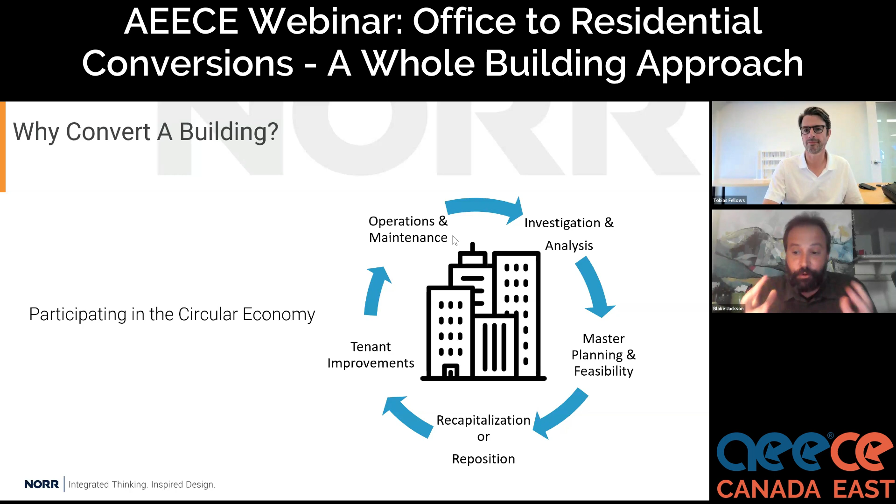Another big aspect of these projects is the ability for these individual projects to help regenerate our urban core. You can see in this image that, as Blake mentioned, there's a glut of office buildings within one location. And how can we use a building conversion program to help reimagine what a downtown can be, and really look at how these projects can bring people back.

I know the government is thinking about legislating a 3-day work week. That's going to bring people back in a particular way, but bringing them there to live is really creating the kind of change that I think will be necessary for these areas to really thrive, with all the existing infrastructure that is already built there, and these small businesses that rely on people. I think it's really important that we take this opportunity and reimagine our downtown urban cores, using this as a tool to reimagine them.

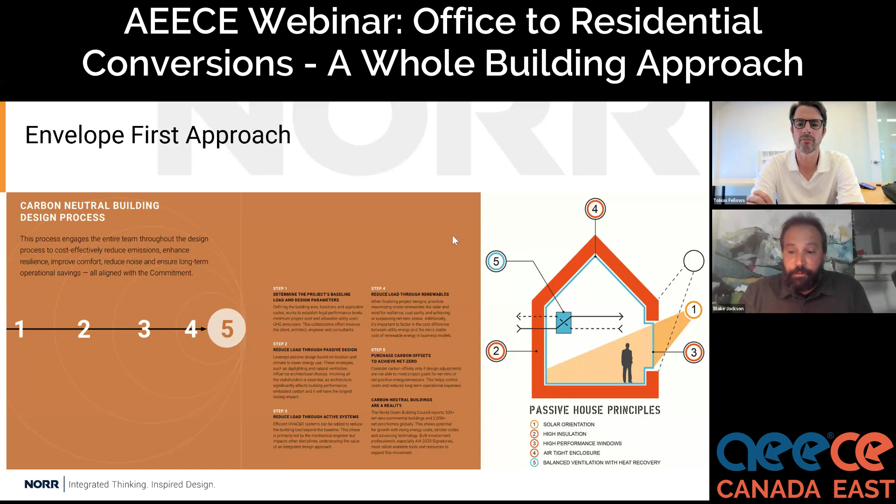So if we go to the next slide, this is just a look at that idea of starting with the building project and then right sizing the program, orienting it to its site and or climate, and utilizing nature-based solutions as we can. Obviously, we can't pick up and move around existing buildings, but we can open them up to better access to daylight. We can reconfigure space planning measures in order to respond to views and climate and heat and different types of things.

So by focusing on the envelope and getting it as airtight as we can, and pressurizing the building in ways that are promoting indoor air quality, and insulating where we can, and maybe replacing glazing where we can, suddenly it provides us an opportunity to downsize our systems as a response, to electrify those systems more affordably, utilizing again the architecture as a passive design element itself, or an envelope first based approach.

Then once we minimize those loads for those end uses as small as we can, then we can very cost effectively introduce either on-site renewables and or off-site renewables to get to a pathway to zero for existing buildings. Now, this becomes, again, more challenging the more you move towards the heritage end of the spectrum. But this is, again, an example of how an envelope first based approach can work in both a new construction scenario and a building adaptive reuse scenario as well.

Yeah, and the interesting thing about a passive house approach is Passive House actually has a rating system that allows you to upgrade a facility over time. So, for instance, if your mechanical plant still has 10 years of good life in it, through the Passive House EnerPHit program, you can do all of your other renovations, like your building envelope upgrades, and then you can go back and look at upgrading the plant at a later date. This system allows you to upgrade certain components over time. So that's something to be aware of if you're looking to get into a rating system to quantify your actual project.

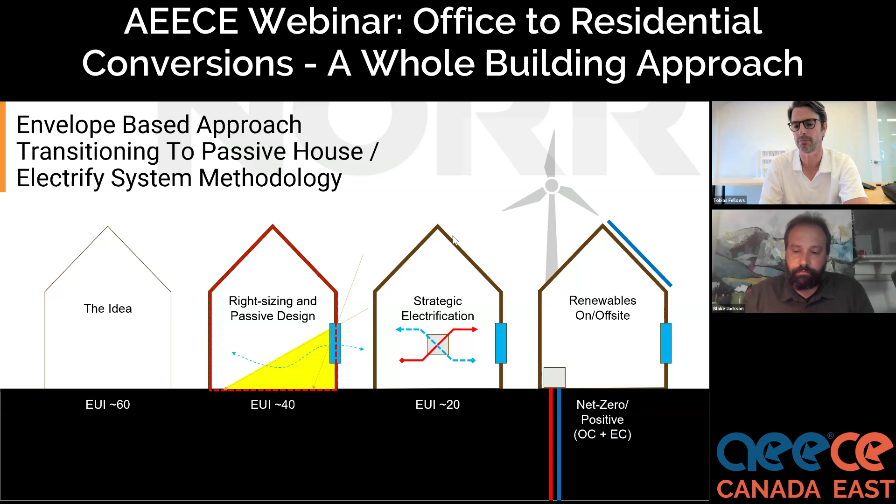And so we'll look at a project from my past work here in the city of Boston, where I'm located, but I do, again, practice across all of North America. This is a historically significant project on the National Register of Historic Places, so it would be considered heritage by Canadian standards, in the Charlestown Navy Yard. And this is a historic district and a historic building within a historic district. So we had a double whammy.

And it was an existing building that was somewhat falling into ruin, that was being reimagined as a potential affordable housing complex. And so we had the juxtaposition with the historic value of the building, and you can see some of the spaces on the inside that, well, it didn't take much logic to say, hey, we could do something really cool with this.

And the idea was that this was going to become a museum to the Chain Forge and the Navy Yard at some point. But we also had conflicting items: they wanted us to seal the envelope. They wanted us to electrify the building. They wanted us to raise it up because it was in a floodplain. There were lots of things that we would have been easily able to do in a new construction scenario, and yet we're limited by the heritage value of this building.

The one other point that I'd like to make here is that because this building is on the National Register here in the US, 50% of the pro forma could be covered by historic tax credits. Now, you don't get them until the very end of the project, and so it's a balancing act to determine if you are in kind or in good faith preserving the historic and architectural value of the building. And there aren't very specific guidelines on what that means, because each one of these structures is unique.

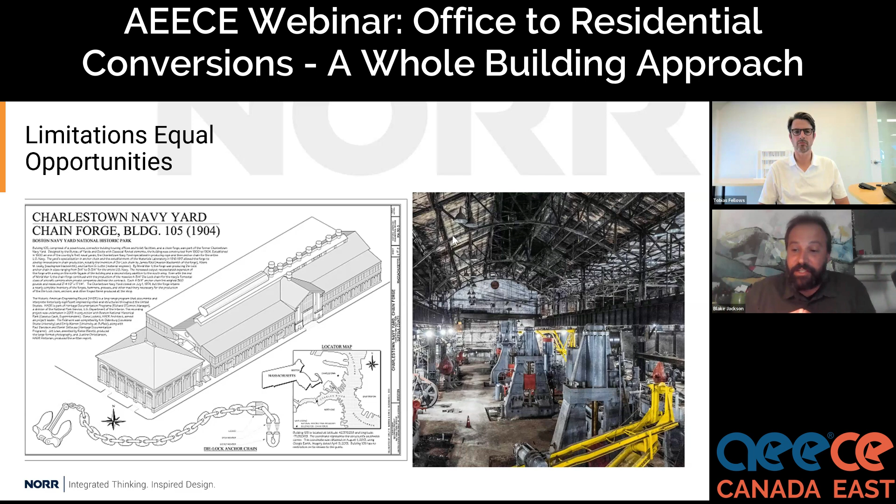So we had to balance the need to meet what the city wanted, which was essentially a new construction, all-electric passive house in a very leaky, old, historically significant building, which created a lot of challenges. So if we go to the next slide, talk through some of those opportunities here and on the next slide too. But basically working with the existing building to say, well, we need to evaluate what's there anyway, and what makes this historically significant versus what can we improve.

And so in this case, we were actually able to add insulation on the inboard side, which did take away from some of the character of the building in terms of the exposed brickwork, but it was something that we had to do just to meet modern codes, as well as to really focus on the outside of the building, which was what was truly historically significant, particularly since we were modularizing the spaces and putting in housing units. You were going to lose a lot of that capability on the inside anyhow, and most of the value was going to be on that large nave space, which was going to be converted into a museum.

We were also able to update the windows and the glazing systems to modern glazing systems, and particularly because we had a low window to wall ratio, we were able to get through the energy model double pane glazing, so it helped to control the cost on that as well. So we were also able to repoint the brick systems, seal up some of the areas, keep a lot of these types of things hidden. But again, a balancing act, working with what the existing building was and its actual inherent architectural heritage value, and new concepts that would enable us to downsize the systems, the energy use intensity, decarbonization, and even potentially electrifying all of these units whenever we worked on the project.

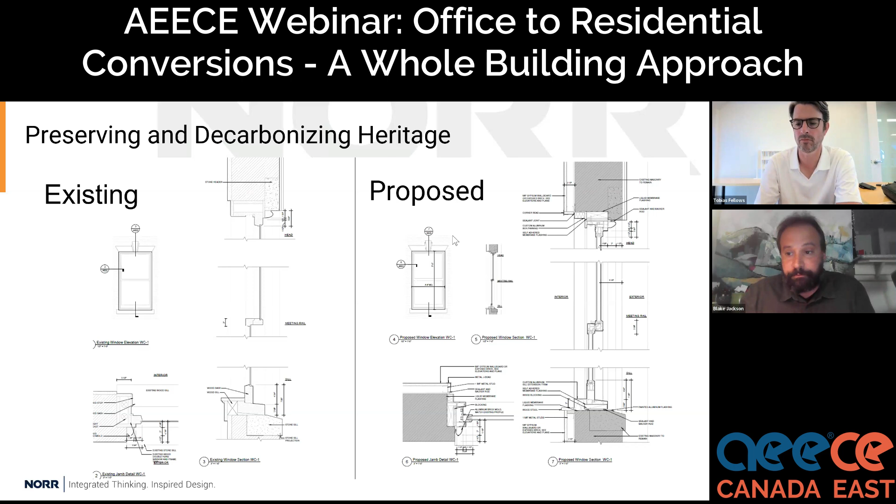If we go to the next slide, this is just to compare the Chain Forge project to another project that we did with the same developer, to say that what we did for one doesn't necessarily mean it's going to get approved from the city side or the historic preservation side in the other instance. So some of these things were left to be determined. But the point here of the envelope first approach rings true, because if you look at how we would evaluate this from an energy modeling perspective and then also a cost estimation perspective, we look at, well, can we alter the roof?

Well, in this case, we had a historic slate tile roof. We couldn't put solar on it, so renewables are off. Upgrading the roof was off, but we could insulate underneath it. So it creates these opportunities for how we can maximize the envelope utilizing modern codes, modern building mechanisms and techniques in order to preserve the historic value. But notice we're looking at roof, envelope, glazing, window to wall ratio, which doesn't change in a historic building unless you're making an addition, and airtightness. You have to focus on that first before you go to the systems. And this is really where the work on a type of project like this begins, but it starts with the architecture.

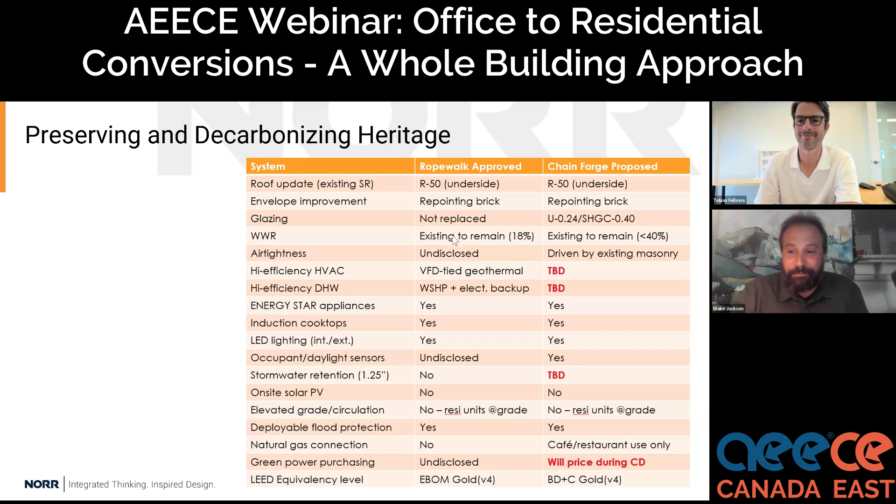And then also on to responsible water use. So water is artificially very inexpensive, so it's very difficult to generate a return on investment for it, but it's another utility that transparency around disclosure of building performance is requiring us to monitor, disclose, and manage.

And so on projects, generally, we will be provided an opportunity to make a big water reduction impact over the baseline by looking at indoor, outdoor potable water use, irrigation systems, the potential for rainwater harvesting, which is very useful, particularly in that scenario that we talked about with increasing stormwater retention and the potential for increased resiliency, particularly in areas that are going to experience more precipitation in a climate change scenario.

That's not always an opportunity for us on existing buildings, particularly heritage buildings. Sometimes you can or can't touch or adapt the site. But again, we're always looking at opportunities to meter and specify efficient water fixtures so that we can reduce that source at the point of use.

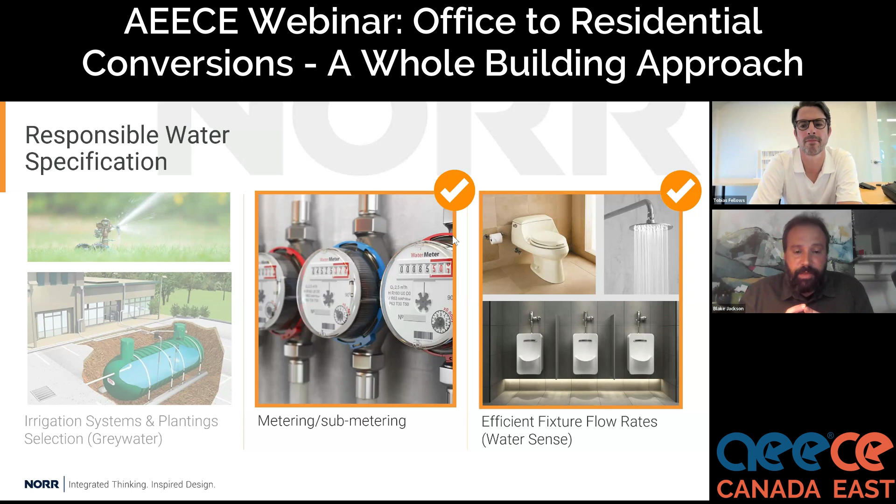And the next slide just talks about some of the specifications opportunities that just through the plumbing fixtures, we can reduce potable water use in existing buildings by at least 40%. And this is a little unfair because that would be like if we were renovating the building from office to office. So it would be very different with more fixtures if we were renovating it from office to residential.

But in any scenario, providing new plumbing fixtures, modern plumbing fixtures that are very efficient helps us in that efficiency, as well as reducing our costs and ability to monitor and report on utility data use for both water and energy systems.

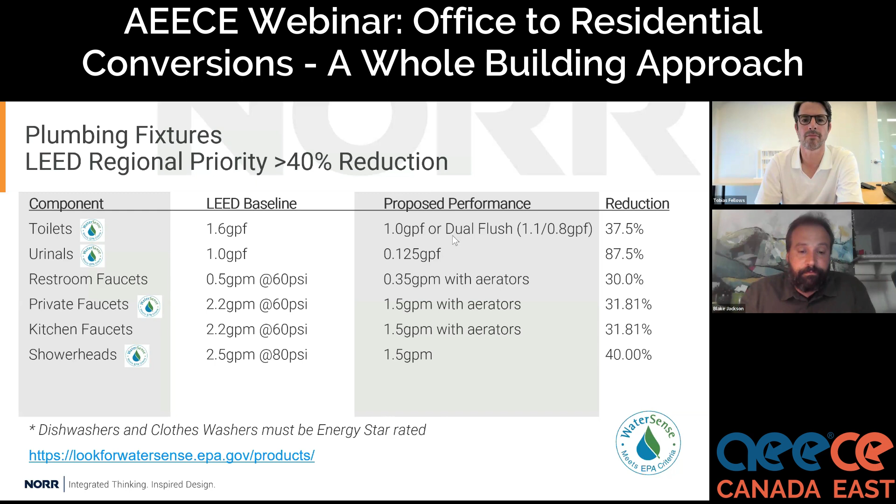And then lastly, all of this work is really predicated upon changing the way that we practice architecture and engineering. So traditionally, we design something, we fall in love with it, we get the cost estimate back, and then we have to sort of begin value engineering pieces of the building out that make it unique and wonder why buildings just become a bit monoculture.

The idea here, particularly because we're focusing on carbon, and this is the direction that Passive House is moving, cities are moving in, green standards in various different municipalities, federal standards, even LEED version 5 is looking at holistic carbon, both embodied and operational, early in the process. And so that requires us to do earlier phased energy modeling and cost analysis so that we can use those not as hallmarks of decisions that we make, but to drive the process forwards, thinking about carbon and thinking about building performance.

And so by doing this work earlier, we're able to make those decisions about the life cycle of a building so that we can strategically come in over the course of the time period which we have to decarbonize, which in different municipalities is 2040 to 2050, to say that, well, maybe we don't do everything right now. We focus on the envelope, strategically electrify some of these systems, and then in 10 years when we replace X, Y, and Z, that's when we come in. So it helps us to make those types of decisions dynamically early in the process in ways that we didn't before. So it's very important to bring that cost estimation and carbon performance modeling to earlier in the process.

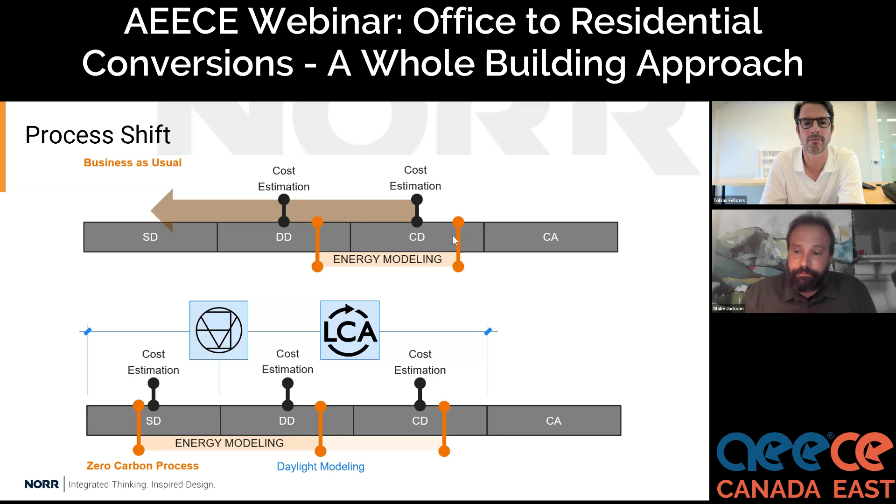But this makes the argument for why it's important to bring these mechanisms to earlier in the design process, because at procurement, you lock in the embodied carbon build of a building forever. Now, in an adaptive reuse scenario, these numbers are way down.

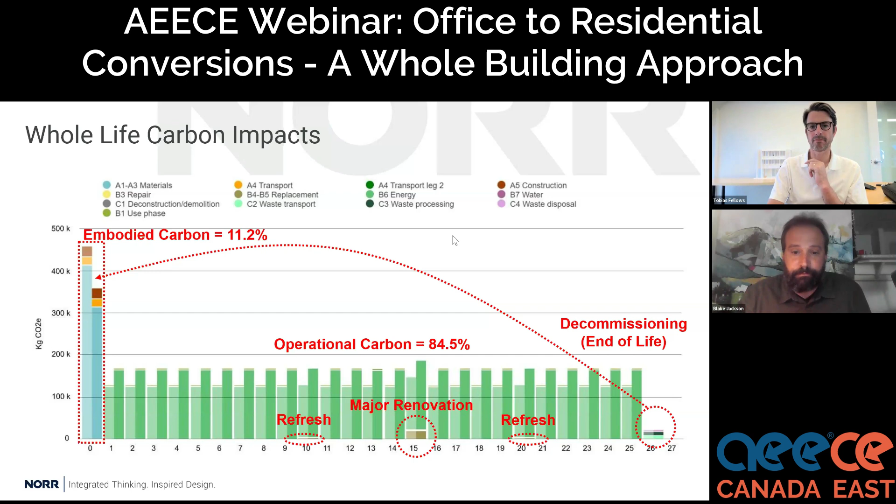And then lastly, we talked about how renewables aren't a first solution. They come after you make the building as optimal as you can, because that helps to control costs and the amount of renewables that you need. And so we are a bit technology agnostic and approach agnostic. We look at the right opportunity that's available to us for the various different projects that we're responding to. There's traditional panels, there's panels over parking, there's on-site wind, there's building integrated PV.

Some of them look like traditional panels, and some clients love that because it directly communicates an ethos between sustainability and the consumer. In other instances, particularly for heritage buildings, those things need to be hidden or concealed. And so there's technologies that allow us to do that by incorporating them into the roofing membranes or onto the building facades, or even the promise of solar glass, which I keep seeing examples of, but not a lot of built examples of. But I'm sure it's out there somewhere. The technology has to exist at some point. But every facade, including the roof and the ground, offers an opportunity to integrate tasteful and meaningful renewable energy to be a part of a net zero carbon strategy.

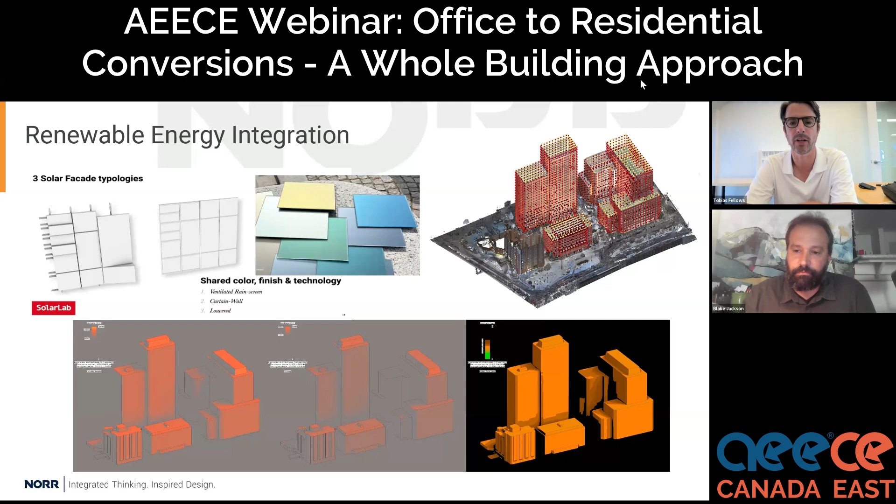We're going to move on. We're going to just hit the last section and talk about some of the challenges and considerations, and then we'll open it up to some questions after that. I think there are three main challenges for these projects. We've touched on some of them already. Obviously, zoning is a big challenge. If you're trying to convert a building within an industrial zone or within a downtown core which is zoned for office buildings, then you're going to need to work with the city and the planning departments to change that to make it acceptable for residential use. I think the cities are aware of these challenges now and are working to try and streamline the process of rezoning. But it's something that has to be looked at the onset of a project, at the very beginning of a project.

Also, because the pro formas are very cost sensitive, we really look at the building code, and we look at part 11 of the building code for existing buildings, and we see where we need to make upgrades and where we don't. If a stair is acceptable and we're not touching that stair or doing work within that stair, then we'll leave that stair as is, and the code allows that grandfathered stair to be not touched because it's not practical to update such a major component. It's not always the case that we can do this, but where we can, we will.

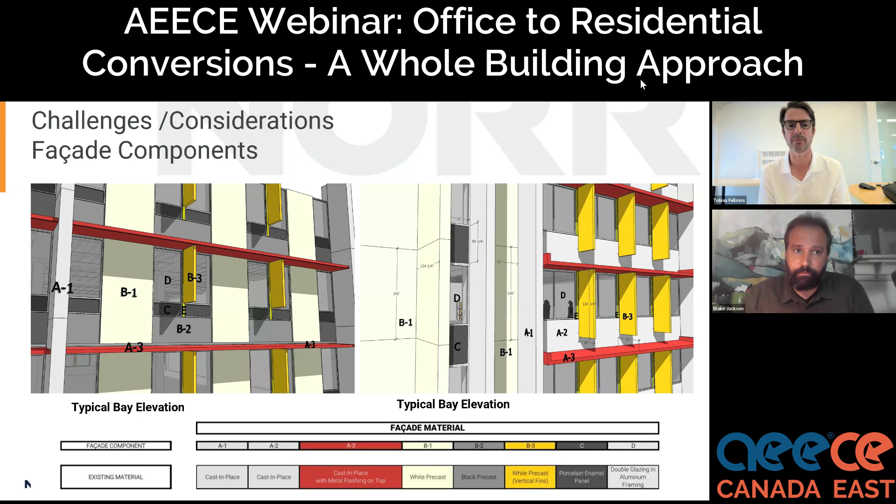So when we were studying this project, we look at elements that we call latent defects. These latent defects are defects in the building from when the building was originally designed. What we're looking at here is one of those horizontal louvers. It's attached to the floor plate and the vertical wall, and it goes from the inside of the building to the outside of the building. So it's obviously a massive thermal bridge. So in these situations, we consider this a latent defect. We really have to study it and understand the implications of this.

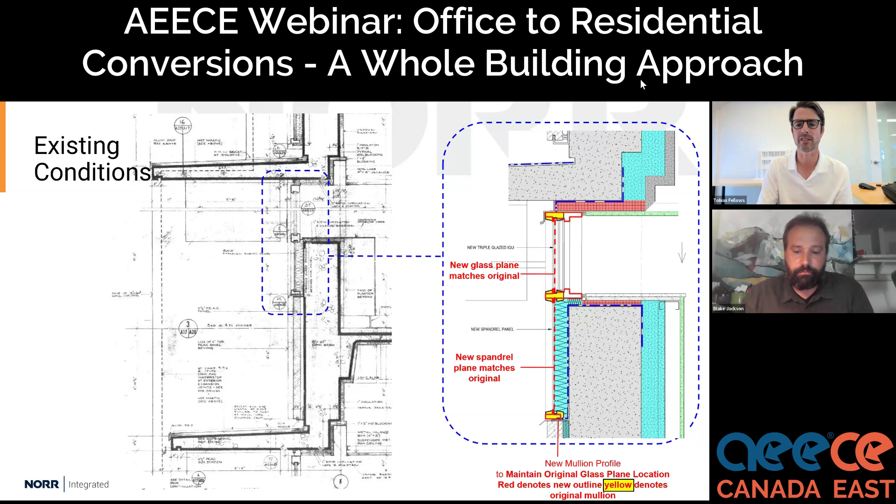And it could be dew points coming in, it could be thermal comfort, it could be durability, and it could be the building envelope and the energy performance of the building. So we really look at all of these things holistically and try and understand. And on the right, we start from a kind of idealized scenario with what would we do in the perfect situation. Well, we want to ideally put all the insulation on the outside, but we can't always achieve that. So sometimes we start to study and we start to get more pragmatic.

We say, okay, well, this can easily be done. The horizontal aspects can easily be done from the outside because we're going to be replacing some facade material, so we can get at it there. But maybe we're not replacing that facade element. Maybe we want to retain the precast, in which case we have to do everything from the interior. And so looking at all of the options and being very pragmatic about what kind of solutions are going to work from a technical perspective, but also from a cost perspective, these are things that we have to do on these types of projects.

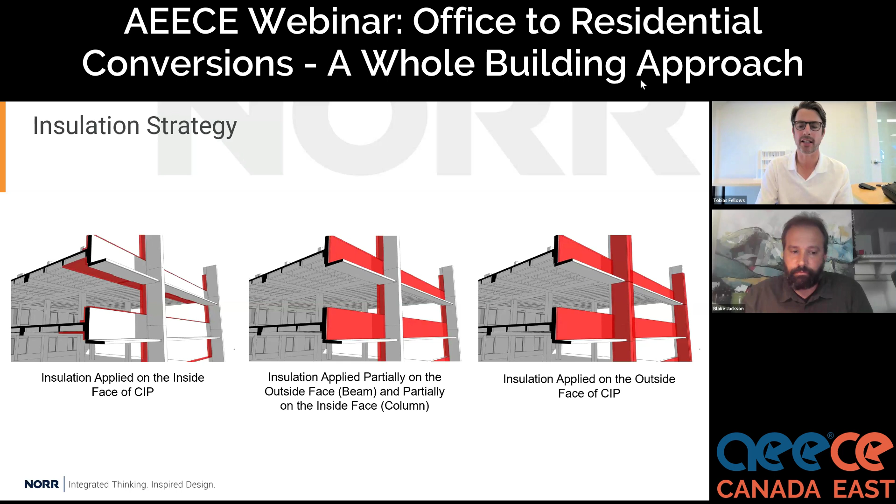So in this particular case, we recommended doing everything from the inside, where the access is a lot more readily available to us, to the workers, and so it just made sense to do everything there, and we were able to achieve all of the energy requirements that the client had set out for this particular project.

Just a few key attributes to leave on. Some things that are kind of like a go/no-go on buildings would be the floor to floor height. You need to have a minimum of 9 feet. We need to make sure that we can fit services within the floor plates of the buildings, and we can't compromise space. Like, we can't compromise the units. If we have ducts going everywhere within a design, maybe in some areas it's okay, but we can't have it running everywhere. Because these units are going on the open market and they have to compete with other units that won't have these encumbrances built within them.

So we really have to make sure that a minimum of 9 feet is something that we've come to learn. And also, on an efficiency level, we need to work with at least 80% efficiency leasable to gross building. And this just means that we're not spending money on areas of the building that aren't making money. Now, there are things to consider on different types of residential typologies, such as student housing, where we might be able to make some more amenity space in the building core.